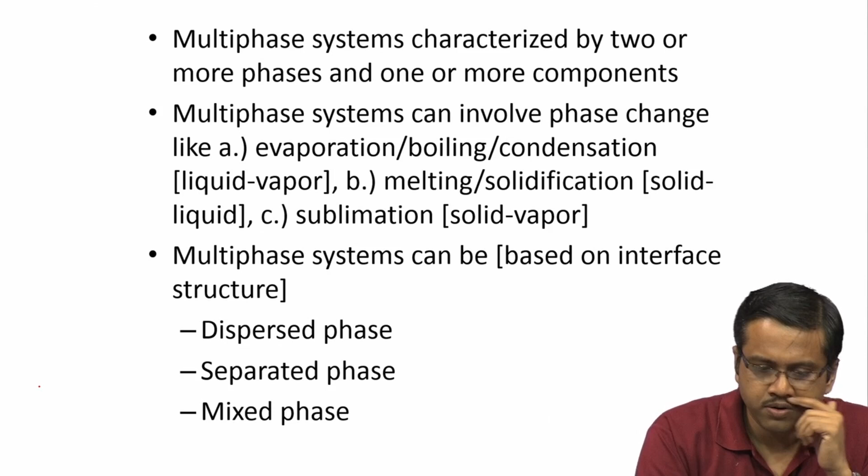Now, multiphase systems can also involve phase changes. And what are phase change events? For example, evaporation, boiling, condensation. Here the phase change happens between liquid and vapor. Let us look at this particular thing. So, evaporation, boiling, condensation involve what we call liquid-vapor transition. Then melting and solidification is another possibility, between solid and liquid. Sublimation is another phase change phenomenon which involves solid and vapor. So, there could be phase changes that happen in a system like this.

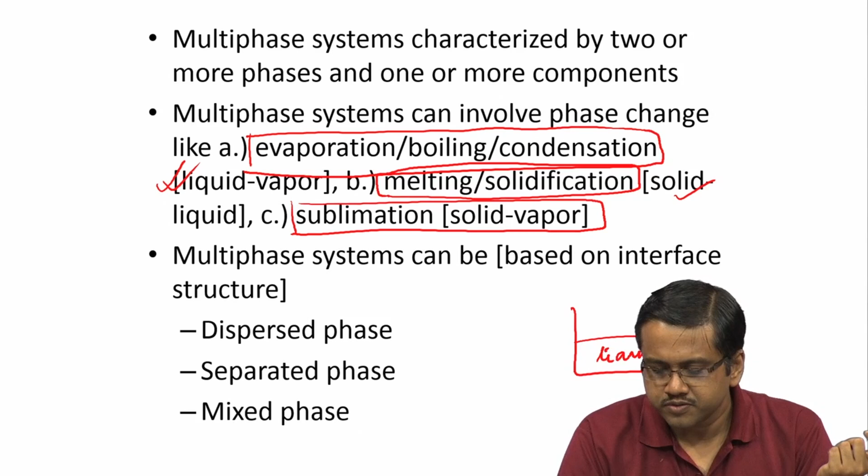For example, going back to the example of a saucer of liquid water. So, this is the liquid water, this is the corresponding vapor phase. Now, in a system like this, water actually evaporates. As we all know, if you keep a pot of water out in the ambient, the liquid level starts to come down. So, naturally there is mass transfer that happens from here to here. So, this is a phase change phenomenon in which liquid water is being transferred to the vapor phase. So, this is one example.

Similarly, you can have liquid water and you cool this, that means you extract the heat out. What happens is that this water starts to freeze, it starts to form ice. So, that is a transition we can call solidification, because it involves solid and liquid. Similarly there can be sublimation problems also. Naphthalene, for example, sublimates; it directly gets converted from solid to vapor.

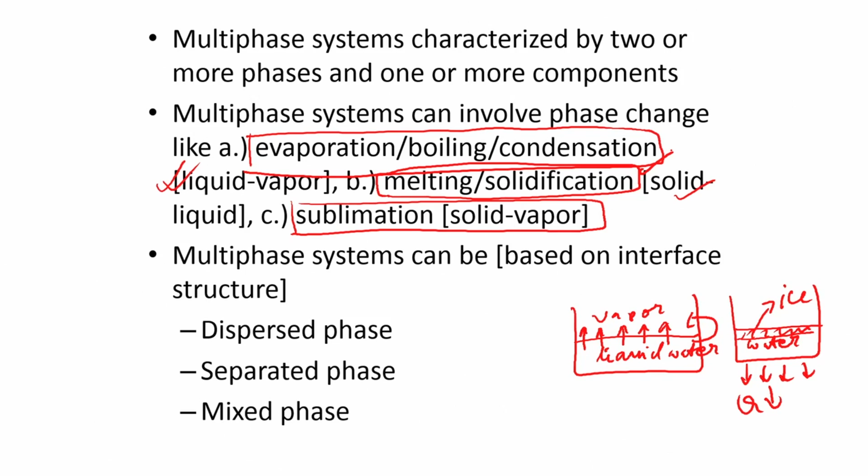So, multiphase systems, as you can all see, have a specific interface structure. What do I mean by interface structure? If you look at the same problem of liquid water, this is liquid water, this is the vapor, you can see that the vapor and the liquid phase are separated by this particular structure. So, this particular structure is what is called an interface.

Okay. So, the interface means it is a separating surface, which basically separates the two phases. In this particular case, it is liquid and vapor. It could be between solid and liquid, it could be between solid and vapor as well.

You have all seen, if you take for example a droplet and place it on a surface, like when you spill something, you can take a droplet out and put it on a surface. So, this is liquid, this is the solid surface and this is the vapor. So, this is a typical example in which this interface, especially this particular sector, is a solid-liquid-vapor phase contact line. This is basically called a 3-phase structure that you form.

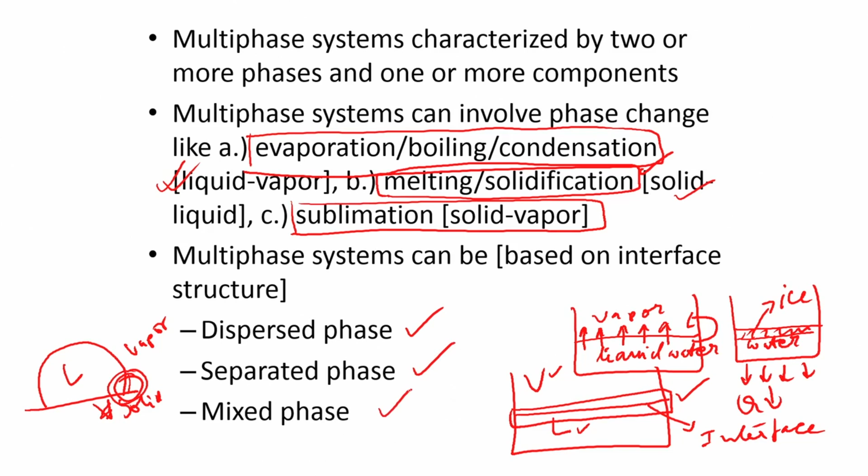So, the multiphase systems based on their interface structures can be dispersed phase, separated phase, or mixed phase as well, and we will see what each of these means in the next slide. Coming back to this particular question, we said that we have something called separated phase, we have something called mixed phase, and in the next slide I will show you what I mean by dispersed phase.

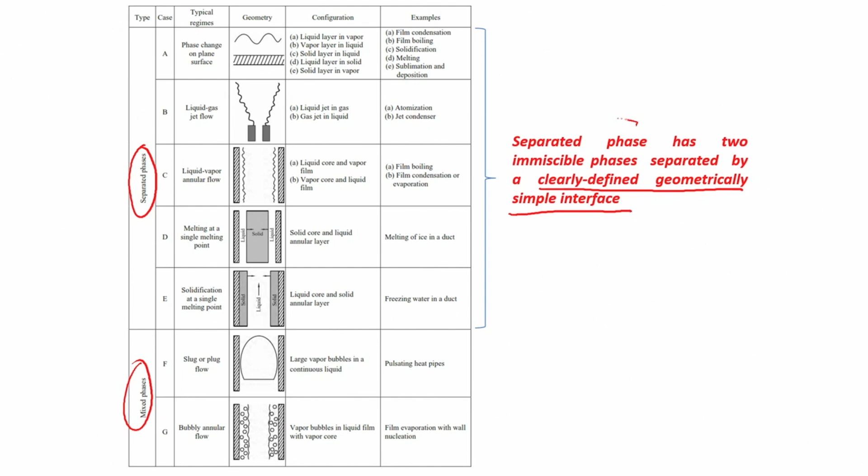Now, separated phase has basically two phases which are separated by a clearly defined geometrically simple interface. This is a very critical definition. A simple, geometrically simple interface is what actually characterizes a separated phase.

Let us look at a few examples. In the picture that you see over here, there is a liquid layer on a solid surface, and the liquid layer has got a particular curvature. So, this liquid layer is a very clearly defined interface, because this interface is very simple, it has got a nice structure to it, you can almost define it by a functional form. Examples of such systems will be film condensation, film boiling, solidification, melting, sublimation.

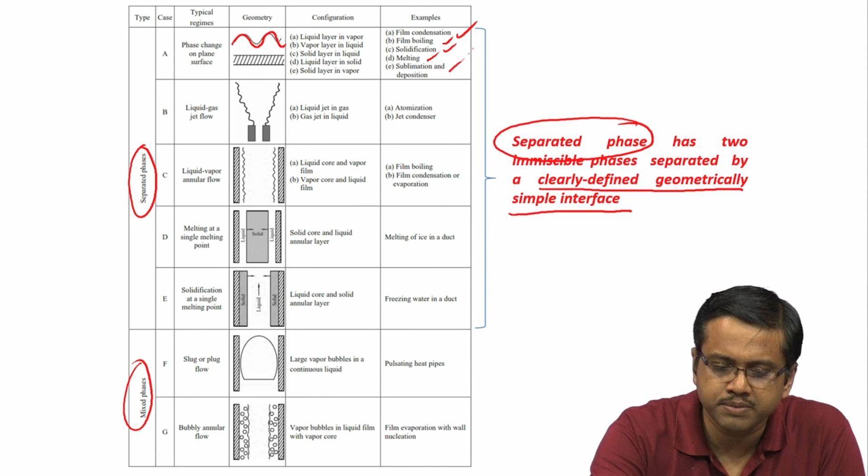This need not be only a liquid layer on a solid surface; it can be a solid layer on a vapor blanket, it can be a vapor layer in a liquid. So, it can be a variety of things, but the interface is very simple, it is just a wavy interface. The next example can be when a liquid jet or a gas jet is coming out into the other phase.

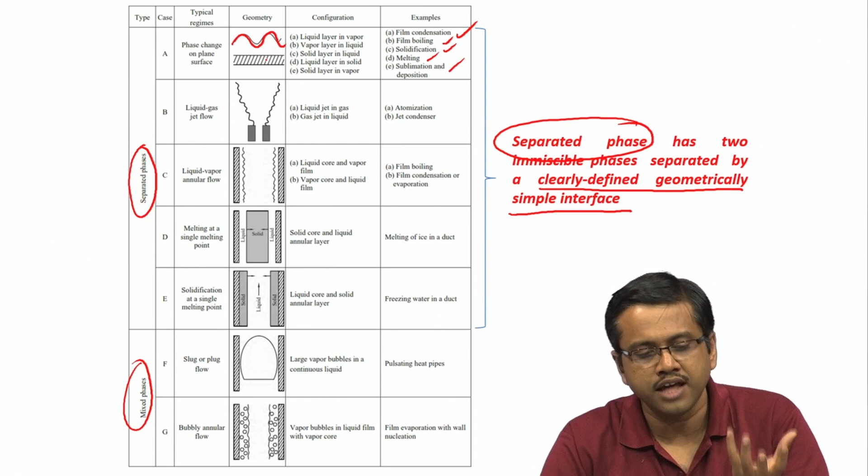For example, here there is a pipe in which you are flushing in liquid. So, this liquid jet is coming out in an ambient vapor core. This is the liquid, this is the corresponding vapor core. As you can see here also, the interface is nice and simple. It need not be flat and straight, it is just a nice interface.

Similar things can be seen in a liquid-vapor annular flow kind of a system. Here the inner part can be a vapor and the outer part a liquid, or vice versa. This example works for atomization problems, like in gas turbines and other applications. It works in the case of film boiling, film condensation, film evaporation, etc.

Similar things can be seen in other applications as well; not going into the details, but you can read up this particular portion. So, it essentially means the interface, the separating surface between the two phases, is a nice and simple geometric interface.

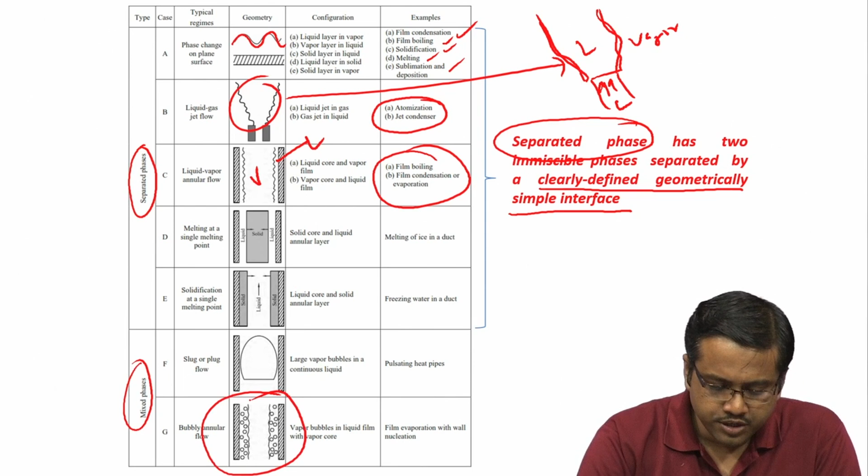Let us look into the mixed phase problem now. The mixed phase problem is a slightly more difficult problem to address. It does have some features of a separated phase, in that there is a clearly defined interface, but if you look at this example over here, you do see a clear interface like this, but at the same time you see additional phases present inside that particular phase. So, it is like a phase within a phase kind of problem.

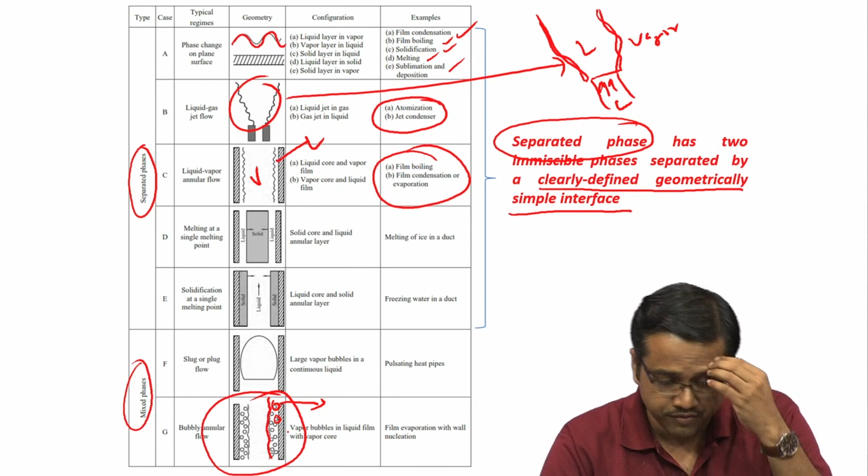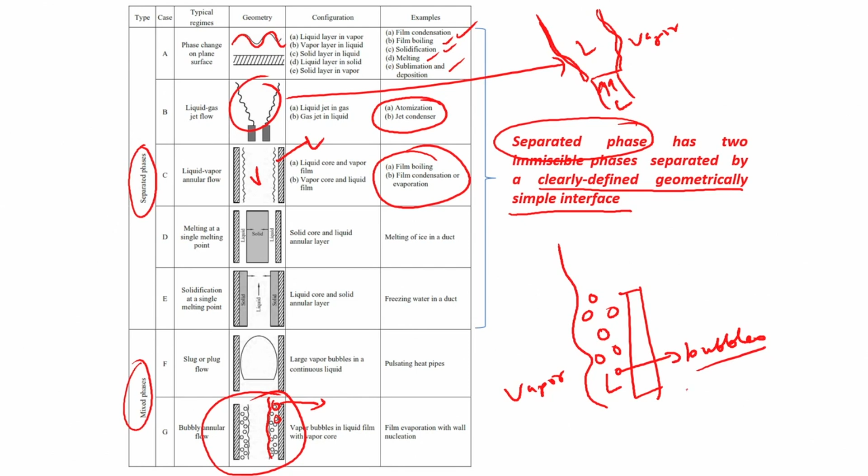For example, in this case there are vapor bubbles in a liquid film. If I magnify it, this is initially the liquid phase, this is initially the vapor core, as you can see from the example. But some of the vapor has manifested itself as vapor bubbles. So, these are bubbles that are situated inside the liquid core.

So, here it is a typical problem in nucleation. We will come to those kind of specific details later, but here you can see it has a clearly defined interface, but at the same time it has got this particular phase present within the liquid core. So, this is what we call a mixed phase. It has got a feature of the separated phase, as well as, we will see, the feature of a dispersed phase.

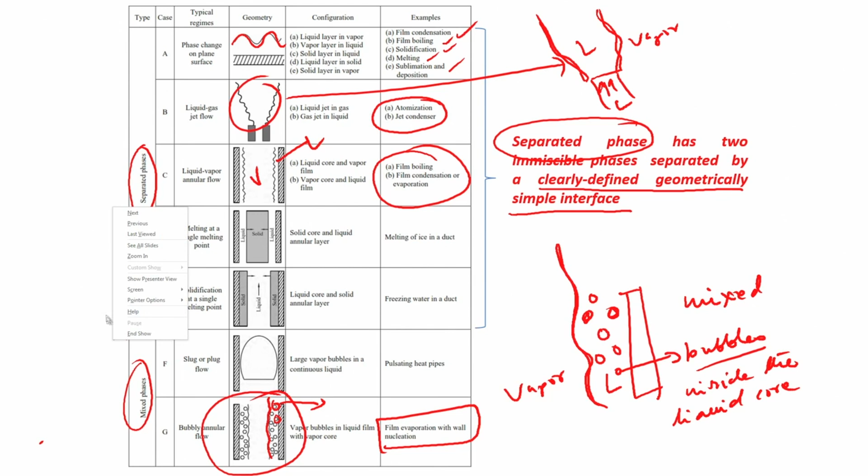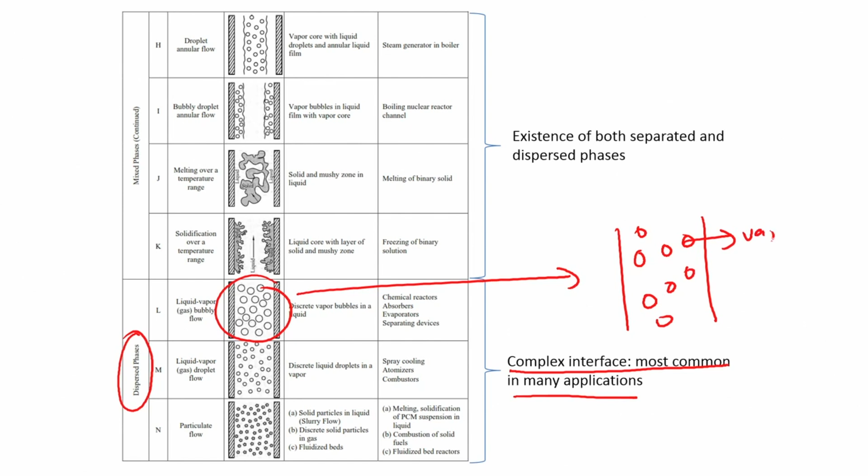So, if we look at the next slide, the dispersed phase problem, this has got the most complex interface. For example, if you look at this particular application over here, you will see that these are basically vapor bubbles in a liquid core. You can see readily from this particular problem, this is a vapor bubble in a liquid core.

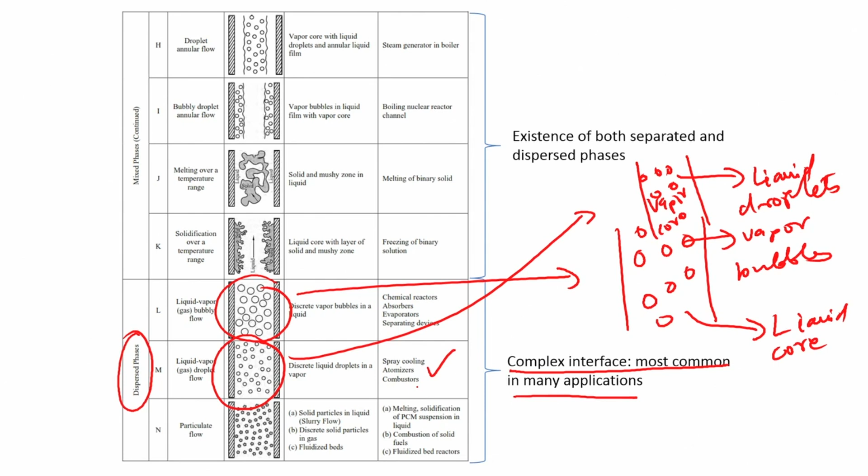So, there are multiple interfaces and the interfaces are complex and they are dispersed within the other phase. One phase is basically dispersed in the other. The same problem can be also in the other case as well. That means there is now a vapor core and then there are these liquid droplets. And they are used in multiple applications, as we can see, spray cooling, combustors, atomizers. The other one can be used in chemical reactors and things like that.

It can also involve particulate matter. So, in the solid interface, what you can see is that there are solid particles which are dispersed in a liquid flow. So, the interface is now between a solid and a liquid. So, the dispersed phase are very complicated. This requires special handling and these are very common applications as well. Most of the applications that you will find will have dispersed phase.

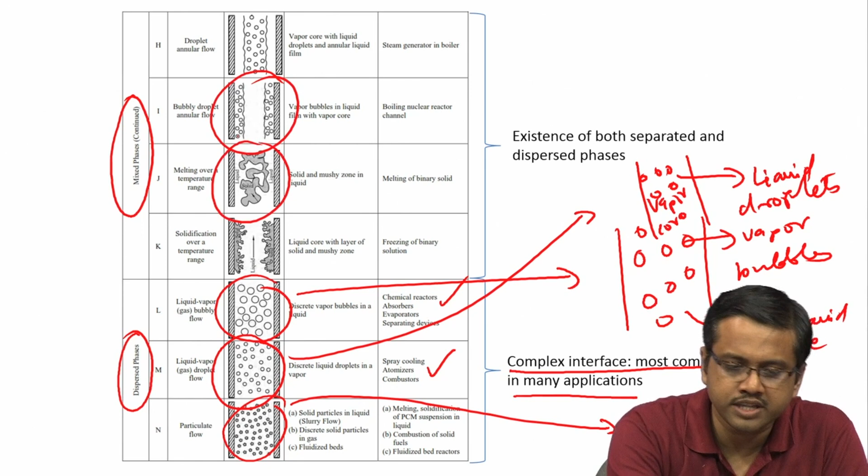So, essentially, on one end of the spectrum you have the separated phase, nice and easy problems to solve, very well defined interface. On the other side of the spectrum you have the dispersed phase, very complicated, where one phase is actually dispersed in another. In between these two you basically have what we call the mixed phase, which has got characteristics of both the separated phase as well as the dispersed phase, like applications like this, or the things that I showed you in the last slide.

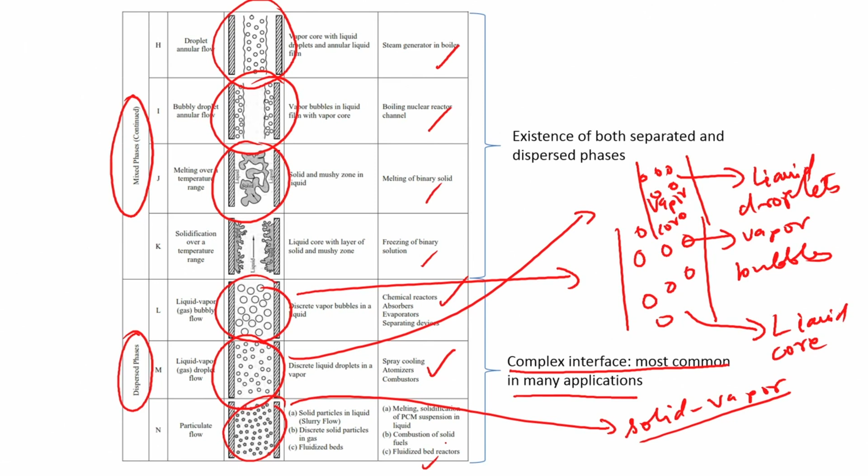And on this side we have written all the applications where you will find these kind of systems. You can see almost all the real systems in the world, right from gas turbine to spray cooling to thermal storage, and we will see some of those applications a little later. All of them are multi-phase applications; all of them involve liquid, vapor, solid interfaces in some form. So, real life problems are all more or less multi-phase in nature. That is the reason why you should study multi-phase flow as well.

Now, an important part of multi-phase systems is studying the interfacial phenomena, because individually we may just deal with a liquid flow, and one example of a liquid flow is flow through a pipe. This is an example that we can relate to in every aspect of our lifestyle. Flow through a pipe is a pure liquid flow, and we know the equations that govern it. Similarly, you can also flow gas through the pipe; it would basically be the same.

However, when you have two phases involved, you have to not only take into account the liquid and the vapor, but you also need to take care of the interfaces between these two phases. And you have to understand how the interfacial transport happens, whether from the liquid to the vapor, vapor to liquid, or solid to vapor. You have to understand the transport mechanism across that interface. So, interfacial phenomena is extremely hard, and it is extremely important to study. As an example of where it is very useful, take cloud formation.

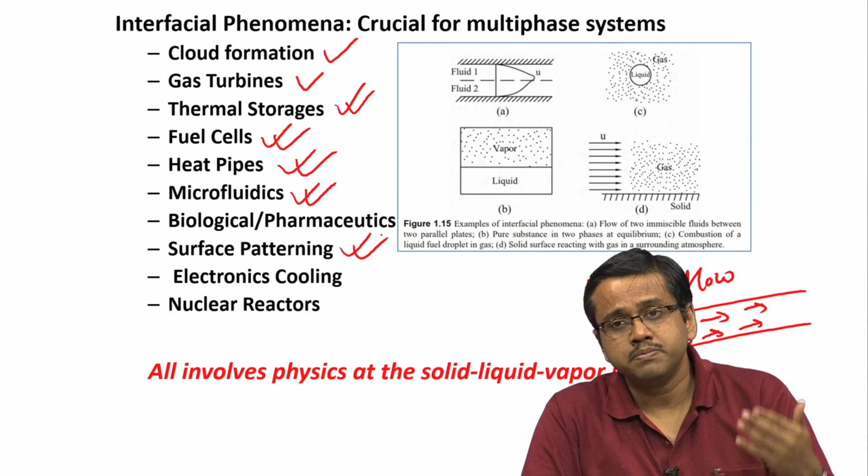Surface patterning, the things that you use to generate, for example, electronic circuit boards, or preparing specialized surfaces for energy harvesting, those surface patternings are also done using a multi-phase framework. Similarly, there are other applications like electronics cooling and nuclear reactors; all of these basically involve multi-phase systems. So, all involve physics at the solid, liquid, vapor interface, and we need to know how this interfacial phenomena behaves.

And these are some of the examples. This is a combustion application, for example, where you actually have a liquid droplet which is burning in a gas field. You can also have a solid surface which is reacting with a gas phase directly. So, this is solid with gas directly, also an example of a multi-phase system. Similarly, you can have a pure substance in two phases in equilibrium. The water evaporation problem that I showed you basically involves liquid water and water vapor in equilibrium. You can also have the pipe flow problem that I showed, if you have two different phases flowing.

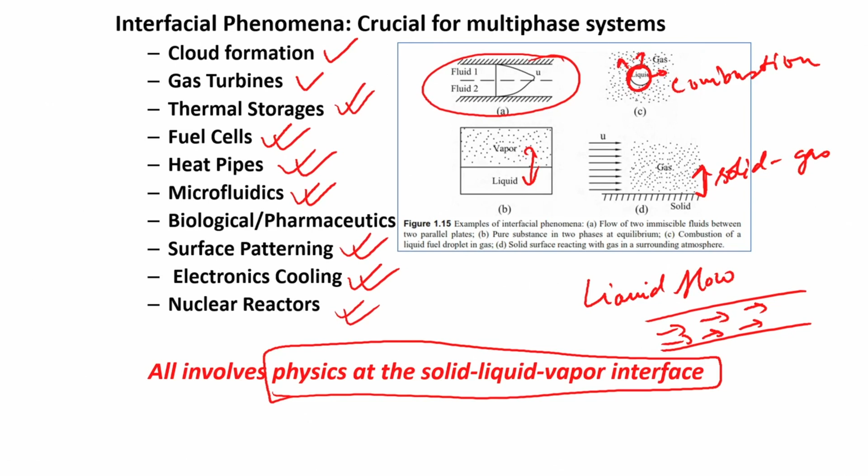So, it is very common to have these kinds of systems, and it is important to understand what happens at those interfaces: how the heat, mass and momentum get transferred across those interfaces. That is the main purpose of this course as well. So, let us quickly take some simple multiphase systems and give you an idea before we go into the thermodynamics of multiphase systems.

So, let us take the first example, thermal energy storage. Thermal energy storage, as I said, uses latent heat, basically a phase changing material. What you see over here is the phase changing material. There is a hot fluid or cold fluid that flows through the inner pipe. If it is a hot fluid, the heat gets transferred to this PCM. This PCM actually changes its phase, and the energy of this particular fluid is stored here.

So, imagine this is coming from a solar tower, and that is the heat transfer medium. You flush this fluid through this pipe, and you store the energy, which is nothing but solar energy, into this PCM just by melting the PCM. Similarly, when you want to extract heat out of this PCM, you pass a cold fluid through it, extract the heat out of the hot PCM, and then use it for any number of applications like lighting your bulb, or other applications as well.

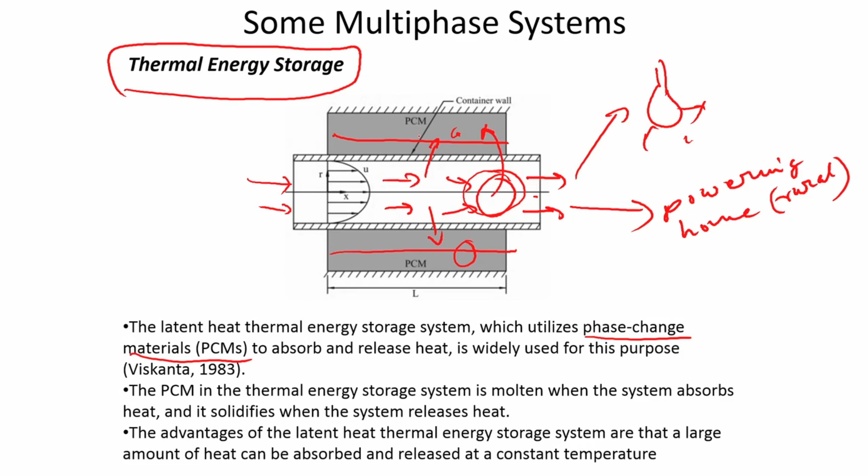So, like powering your home, especially in the rural sectors; this would be particularly important from an Indian perspective at least. So, this has got some major advantages. Here you can see there is a phase change in the PCM, from solid to liquid and liquid to solid once again. So, naturally you have to know how the heat is transferred across the interface. This is thermal energy storage, a big candidate because we do a lot of research in this area. What you see over here is basically a gas turbine.

Now, the gas turbine is a very complicated machinery. It provides 25 to 30% of the world's power and aviation needs. So, you can see this has been the hallmark of power generation in the world, and it is a very complicated device. We will come to those kind of things later, but if you take a section, a very small section, which is basically this part of the gas turbine, this is where the maximum phase change or the combustion

part actually takes place. What happens here, if you take a zoomed in view, you have liquid fuel. In this case the liquid fuel can be jet fuel or any other type of fuel that is injected in the form of a spray. Spray you have all seen, right? This is the deo spray, for example. So, this is injected in the form of a spray, like for example here, into a hot air stream. Into a hot air stream the fuel is injected.

So, the spray is a combination of many small droplets. If you zoom into this particular area here, you will find that there are many such small droplets. Now, these droplets evaporate, they mix with this hot air stream and they subsequently ignite. So, this red colored thing that you see over here is basically the flame. As it burns, that is how you get the power. You extract energy out of the fuel and you convert it to electricity or propulsive power or whatever it is that you want to do with it.

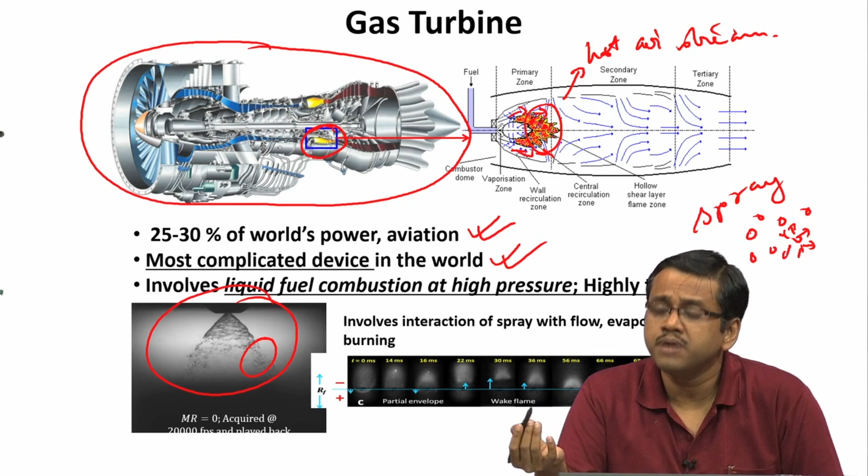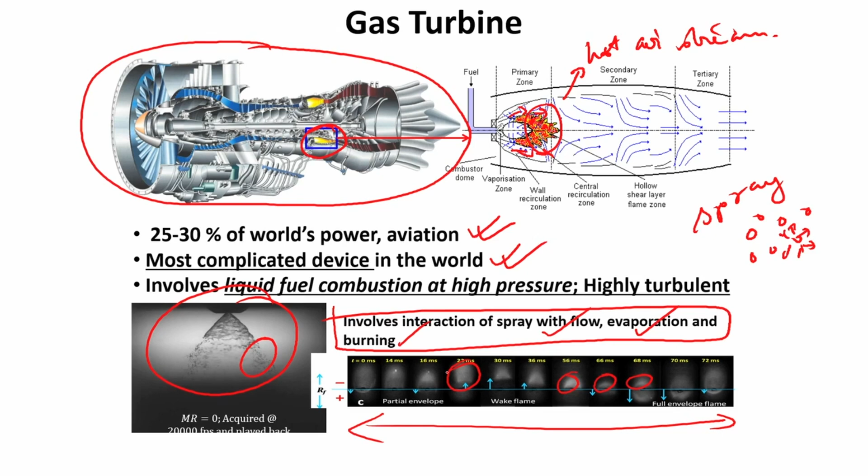Now, the main backbone of this particular problem is how do you vaporize liquid droplets into the corresponding vapor form. So, it becomes a multiphase problem in itself, because it involves interaction of the spray with the flow, it involves evaporation and it involves burning. This is for example a picture which shows how a droplet should actually burn. This is basically the flame. So, the gas turbine is a very big machine, but at the heart of that you actually have a multiphase problem.

So, moving on from the gas turbine, if you are a renewable technology guy, you move on to something which is called fuel cell. A fuel cell is an electrochemical energy conversion device, which converts the chemical energy in the fuel directly to electrical energy. The core of a fuel cell is a very simple mechanism. This is the PEM fuel cell, polymer electrolyte membrane fuel cell. Oxygen is supplied through the cathode, fuel which is hydrogen or methanol comes through the anode, the reaction takes place, you get heat and you get water and carbon dioxide as byproducts. This is the mechanism of the fuel cell from a very global perspective.

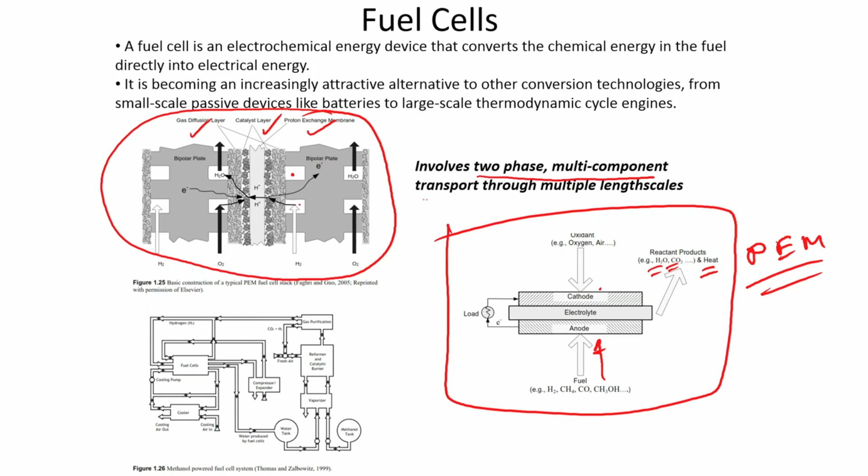However, if you look at the fuel cell complexities right over here, the fuel cell is a very complicated machinery. It has got multiple layers, for example, catalyst layer, gas diffusion layer, the proton exchange membrane. There are millimeter sized passages through which the fuel and the oxidizers are passed. It involves two phase multi component systems, and it also happens at multiple length scales. For example, here the pore sizes can be of the order of microns, here the pore sizes can be of the order of nanometers even. So, this involves flow through multiple passages.

At the same time, the water that is produced is not just produced in gaseous form, it can also condense and it can block passages. So, there are n number of issues, and all of these involve two phase multi component transport. So, the fuel cell is not devoid of a multiphase nature.

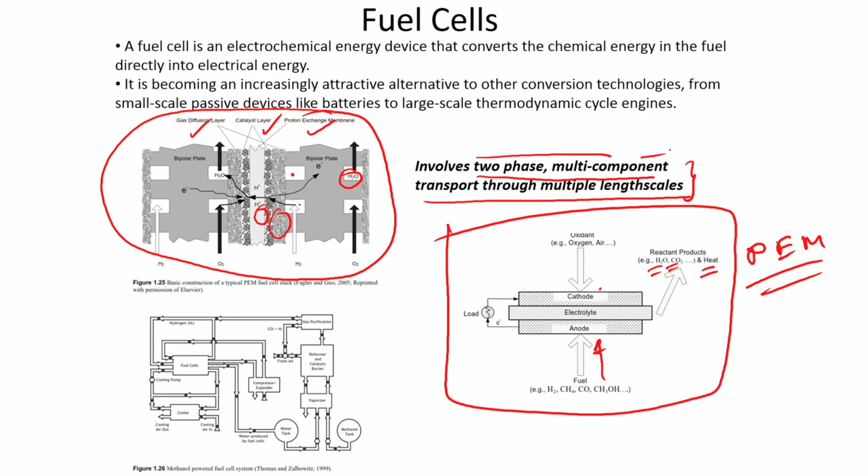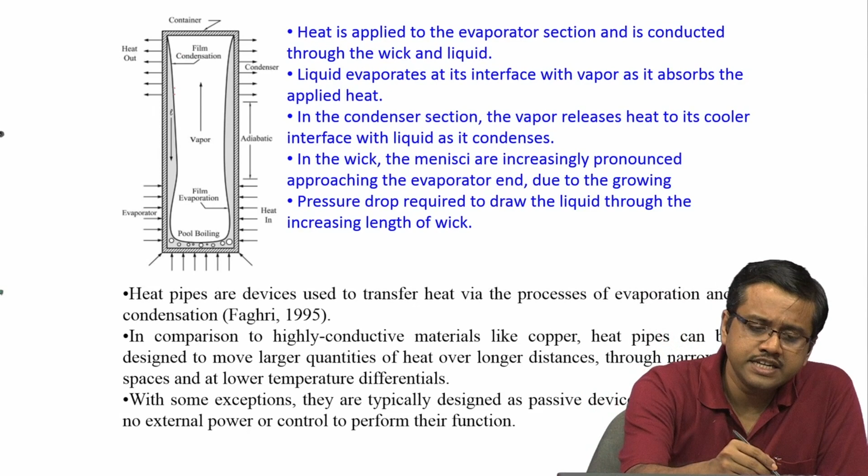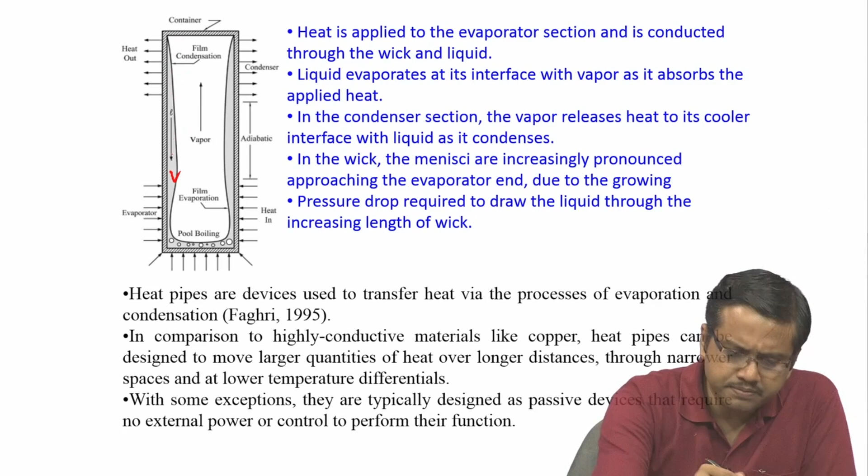Similarly, there is something called a heat pipe. Now, the heat pipe is another device; it is a passive device. So, if you look at the diagram over there, in a heat pipe you once again have a liquid and a vapor interface. What happens is that heat is taken out in one section, from the vapor core through the liquid, and after that the heat is resupplied in the evaporator section right over there.

So, heat is applied to the evaporator section and is conducted through the wick, and the liquid evaporates at its interface with the vapor. In the condenser section, that is in this particular section, the vapor releases the heat to the liquid as it condenses. So, this entire transport occurs through capillary action.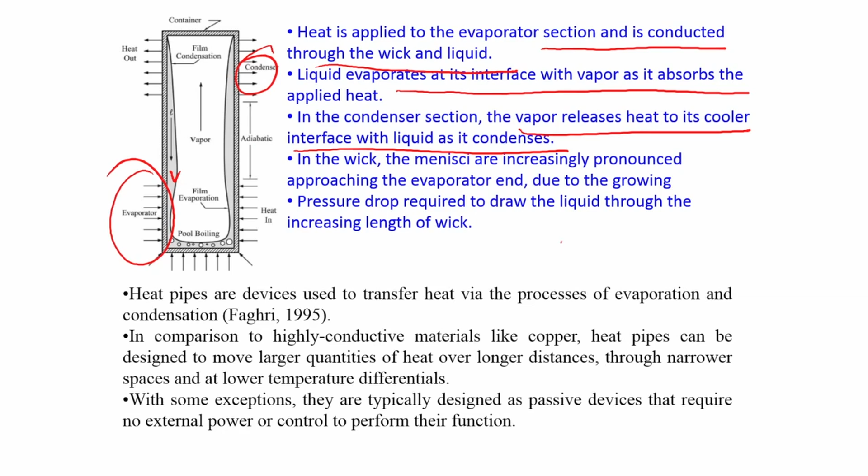So, the heat pipe is a passive device which transports heat from one section to the other, and the core of it is a multi-phase problem, because there is a liquid layer, there is a vapor layer, and then there is an interface which separates the two. In some cases you can also have vapor bubbles forming inside the liquid. So, if you remember the previous discussions, this is almost like a mixed phase here.

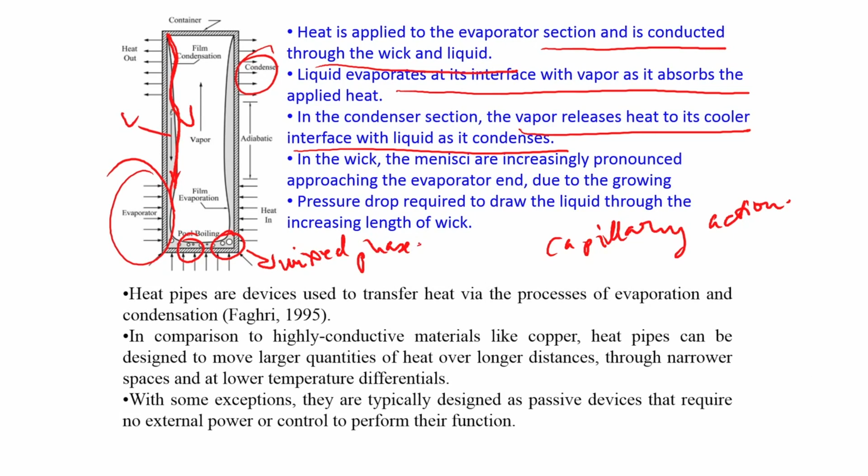So, the heat pipe is one of the key applications in space, because it does not have any moving parts, it is very robust, it is very simple, and it can transport very large quantities of heat. But this is without going into too much detail. This also involves a typical multi-phase problem, as you can see from the diagram over there.

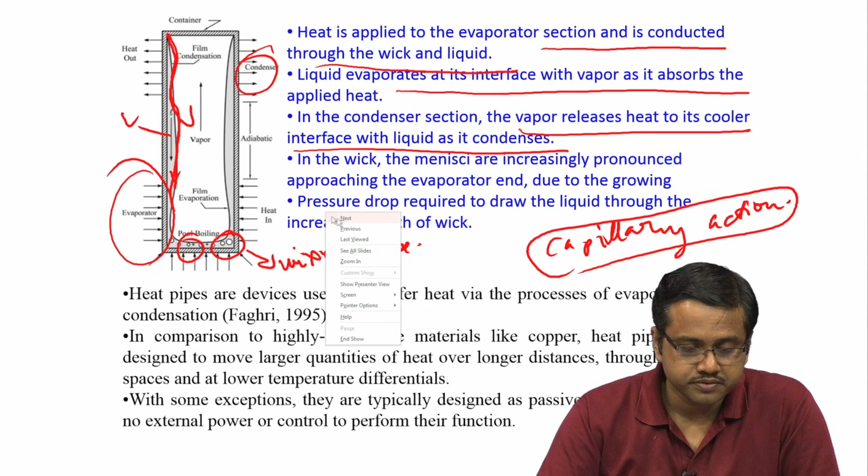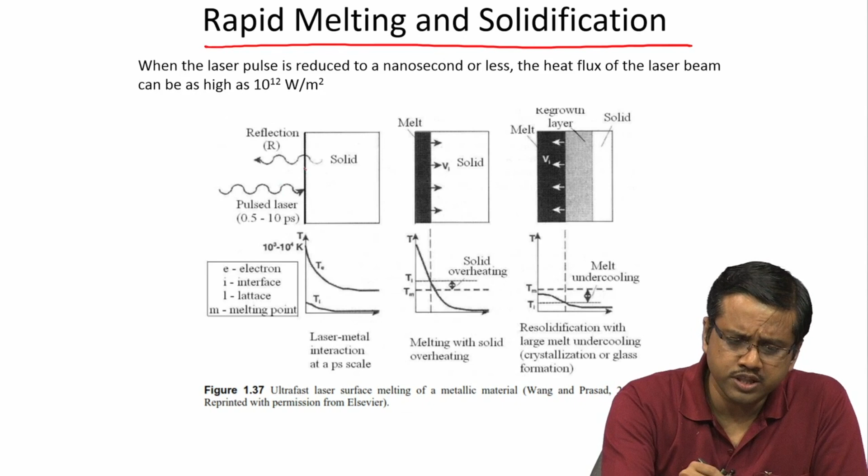Similarly, you can have other cases with rapid melting and solidification problems as well. For example, in this case a solid is irradiated with a pulsed laser. So, it is radiative heating. As soon as the pulsed laser happens, you develop a melt, and this melt front can propagate depending on the heating. Forget about these parts right now, because these are not important; we will come across these parts later.

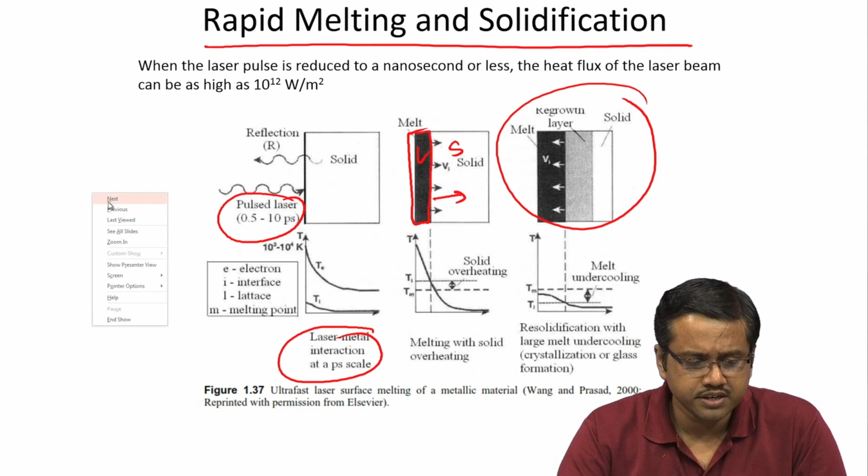But laser heating of solids and melting of solids, or laser metal interaction at very small time scales, is an important problem in many industries, for processing as well as for manufacturing. So, this also involves, as you can see, a liquid-solid interface. So, this entire thing, as you can see over here, also involves this kind of problem.

This is, for example, another problem from our work, which is called surface patterning. What is being done over here is that you deploy puddles of liquid or droplets, essentially in the form of a circuit. It looks exactly like this. Now, this particular fragment of liquid evaporates. It has also got functional materials, whatever you want to pattern the surface with. The liquid evaporates and the pattern gets deposited on the surface in a particular shape and size.

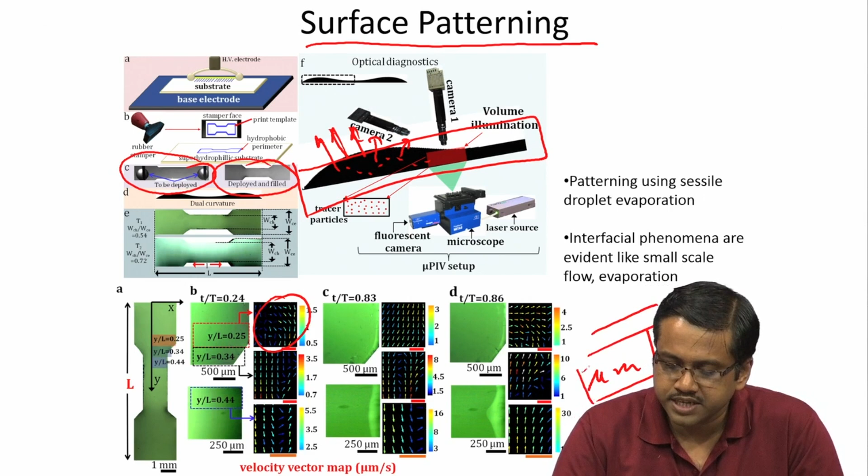Of course, this particular problem involves evaporation, and it involves flow, like we have shown over there, at the micrometer scale. So, this is flow on the micrometer per second scale. In the gas turbine, the flows are highly turbulent, so the order of the flow is like hundreds of meters. Here we are going into the micrometer range. So, micrometer per second flows are there, and it also involves evaporation.

As it evaporates, it leaves behind this kind of pattern that you can see over here on the surface. So, you can generate patterns at different scales just by using a liquid template. The liquid template over here involves interfacial phenomena like evaporation and flow.

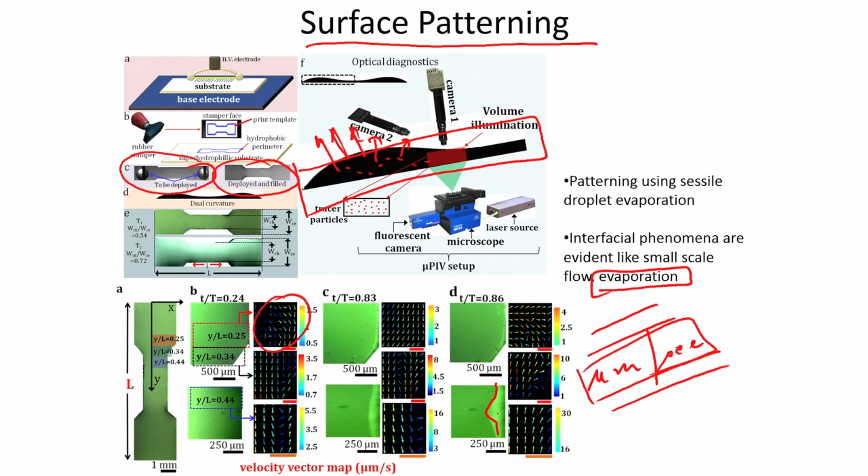So, at this point we want to emphasize that in the first lecture we have covered examples of different multiphase systems. Of course, we have not gone into the details, but we have seen that these multiphase systems can be extremely complicated and very diverse. This is not just one particular area. It ranges from the electronics industry to the power generation industry to the chemical processing industry to any industry that you can think of. These multiphase systems are omnipresent. So, it is important to know about the nature of these multiphase systems.

To know the nature of these multiphase systems, in lecture 2 we will start looking at the thermodynamics of multiphase systems, with a little recap of the thermodynamics that you may have learned earlier, and we will particularly look at how it applies to multiphase systems. So, we end lecture 1 here. We will now go on to lecture 2 to look at the thermodynamics of multiphase systems.